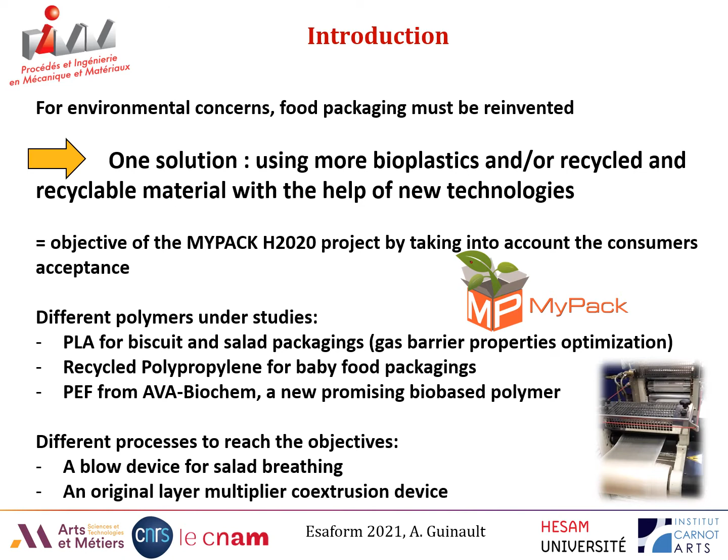The different polymers were PLA for biscuit and salad packagings, where we need to optimize the gas barrier properties, recycled polypropylene for baby food packagings, and in our case, PEF from Ava Biochem, a new promising bio-based polymer. About the processes, we have used in the project a blow device for salad breathing, that is very new, and in our case, an original layer multiplier co-extrusion device.

So if you look at PEF, it's interesting because it has higher barrier properties than PET and PLA - a factor 6 to 8 better than PET and around 100 better than PLA. It has good processability like PLA and PET, and good mechanical properties, even if it is brittle. But it has a drawback: it is too expensive to be used alone. It costs around 4 to 5 euros per kilo.

So an idea is to associate it in low proportion, 5 to 15%, by classical co-extrusion to make 3-layer films, for example with another polymer, bio-based or compatible for recycling, for example polyester. So two ideas have been worked on in the project.

PLA-PEF films in order to replace PET by PLA, where a factor 10 in oxygen permeability is needed, but this will not be presented in this work today. And another one, PET-PEF films, where we can decrease the PET food packaging thickness by decreasing the PET permeability - that is interesting for environmental concerns. Secondly, to replace harmful coatings, PVDC, for high gas barrier PET. But it needs more gas barrier factor improvement.

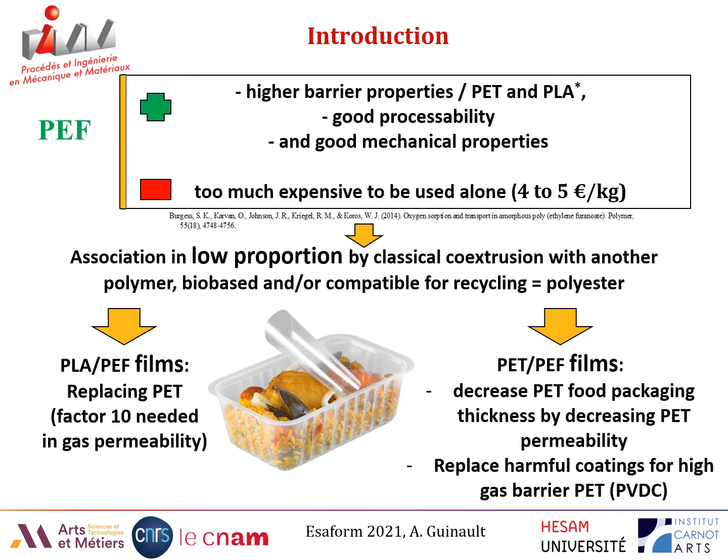So an original co-extrusion tool, the layer multiplier co-extrusion, was used in the project. It is used generally to create multi-nanolayer film, from a classical 3-layer structure to 500 or more confined continuous layers, sufficiently thin - down to a few nanometers - and numerous enough to be measured by the classical thermal, physical, and permeability methods that we use in the project. In the device, you put the PET in extruder 1, PET in extruder A, PEF in extruder B, and a black box permits fabrication of an ABA structure - PET, PEF, PET.

When you use multipliers, you can divide the ABA structure to form an ABABA structure with 1 multiplier - 5 layers. If you do the same with another multiplier, from 5 layers you get 9 layers, and so on. If you use 9 multipliers, you can have around 1,000 layers, and with 10 multipliers, you can have 2,000 layers. So it is possible to calculate the theoretical layer thickness of each layer.

For a film of around 100 micrometers in thickness, comprising 90% PET and 10% PEF, this means you have only 10 micrometers of PEF, and if you use 8 multipliers for example, you have around 250 layers of PEF, so the theoretical thickness of each layer is around 40 nanometers.

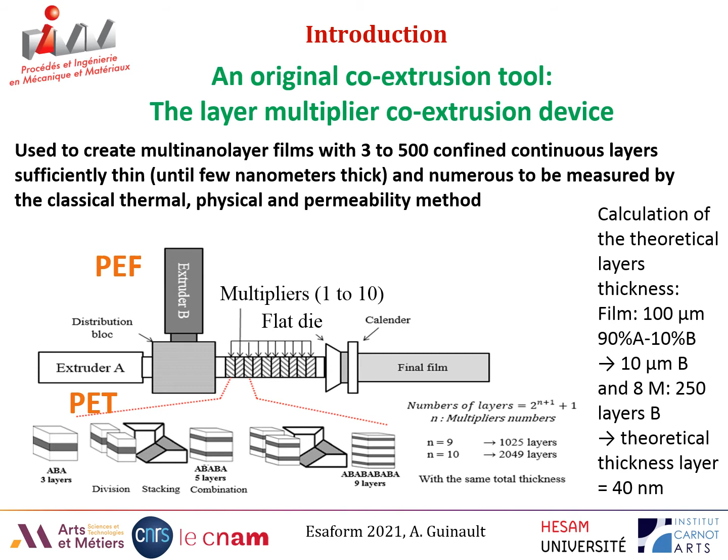So the interest of layer multiplication is to decrease the layer thickness. Why? Because it induces geometric confinement, restricting the space for the molecules and modifying the crystallinity, and finally the gas permeability - that is of interest for our project.

If you look at some work from a Baer team, you can see a system where PEO, polyethylene oxide, is confined between PP layers at 30 to 100 nanometers. You can see that by decreasing the layer thickness of the PEO, the permeability of PEO inside the film decreases by a factor of 10 to 100 when the polymer is confined to a nanometric dimension.

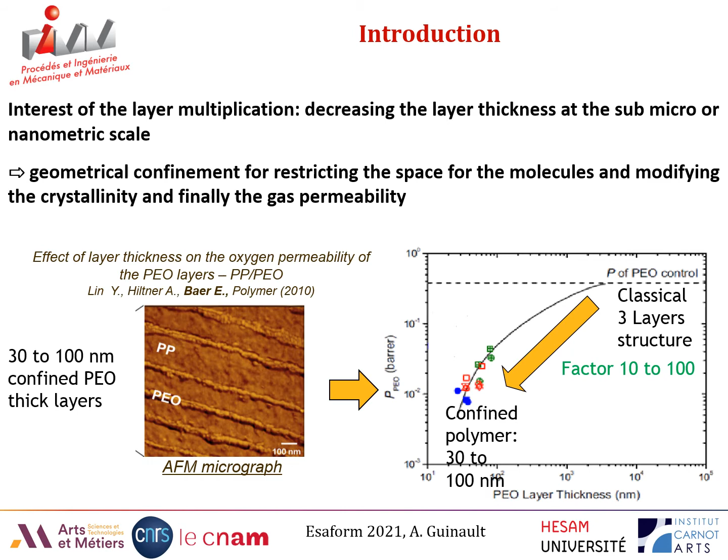So the objective of this work is to fabricate 100 micrometer thick PET-PEF film with different PEF crystallinity degrees, because crystallinity degrees act highly on the gas barrier properties. For that, we have fabricated 3-layer films with 0 multiplier, 128-layer films with 6 multipliers, and 512-layer films with 8 multipliers.

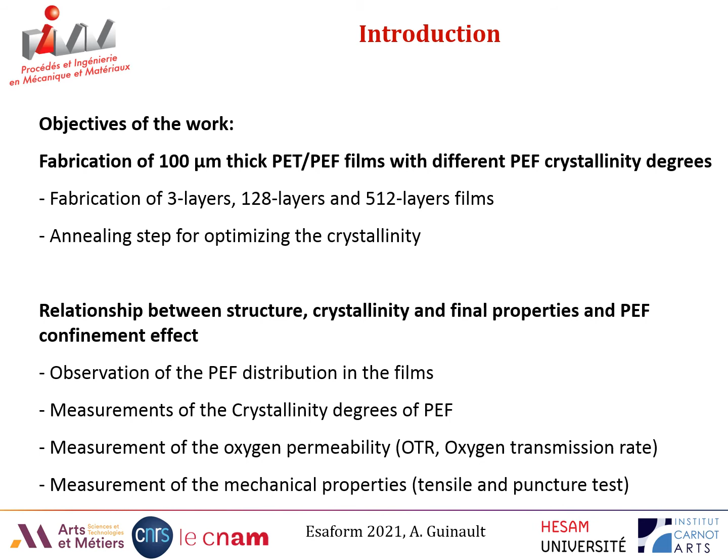We have also done an annealing step for optimizing the crystallinity, and the work consists of studying the relationship between structure, crystallinity, and final properties, and the PEF confinement effect, by observation of the PEF distribution in the film, measurement of the crystallinity degree of PEF, and measurement of the final properties - oxygen permeability and mechanical properties in tensile and puncture tests. So let me present now the experimental part.

We have used PET Indorama 101 and PEF from Ava Biochem. The films we fabricated consist of 3 layers, 128 layers, and 512 layers, with total thickness around 100 micrometers. The proportion of PEF varies from 10 to 15%, so the PEF theoretical thickness varied from 10 micrometers to 60 nanometers with 512 layers, and 230 nanometers for 128 layers.

In this condition, we obtained by extrusion a good film, as you can see in the figure at right. The PET-PEF film looks like PET film - very transparent and of good quality - but it was not possible to produce the film with 512 layers, probably due to the PEF layers being too fine.

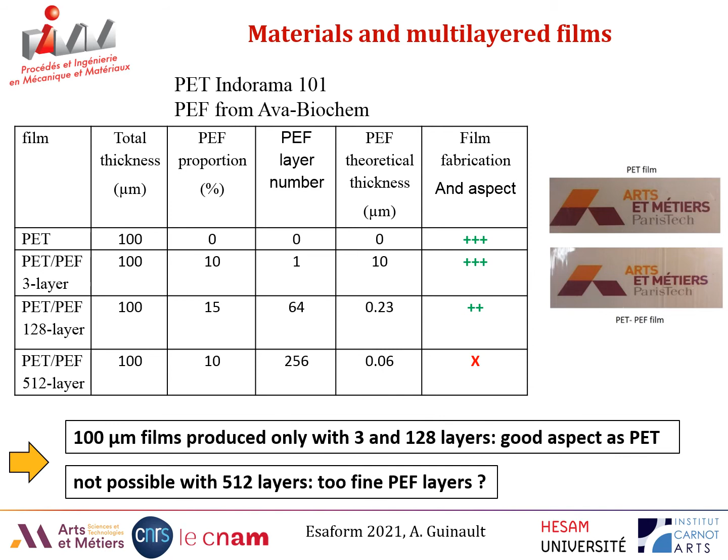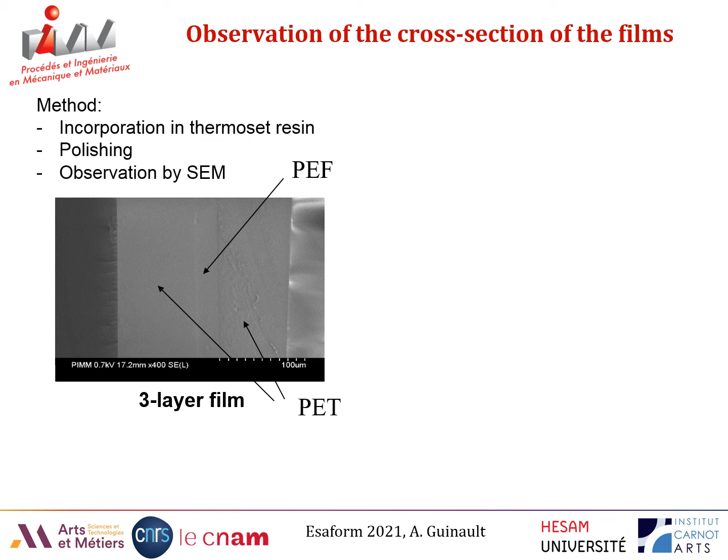Now we have observed the morphology of PEF in the film. In the 3-layer film, you can see on the figure that you have a continuous layer of PEF inside PET layers that are outside.

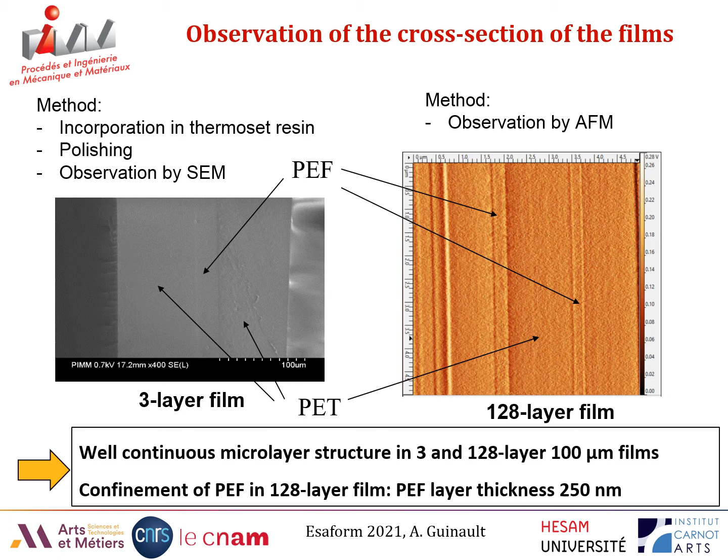Now we have to determine the crystallinity degree of the film, and particularly for the PEF in the film, so that you have used thermal analysis and differential scanning calorimetry.

Here you can see for the 3-layer film the first heating of the PET-PEF film, and you can see that you don't have at the first heating a melt peak of PEF at around 210 degrees Celsius. So it means that PEF is amorphous in 3-layer film as expected.

In the 128-layer films, you can see that you have a peak at 210 degrees Celsius. So it means that you can calculate a crystallinity degree of around 8%. That is low compared to that of pellets, which was 30%, but was higher than that of the 3-layer film, so perhaps due to confinement effect.

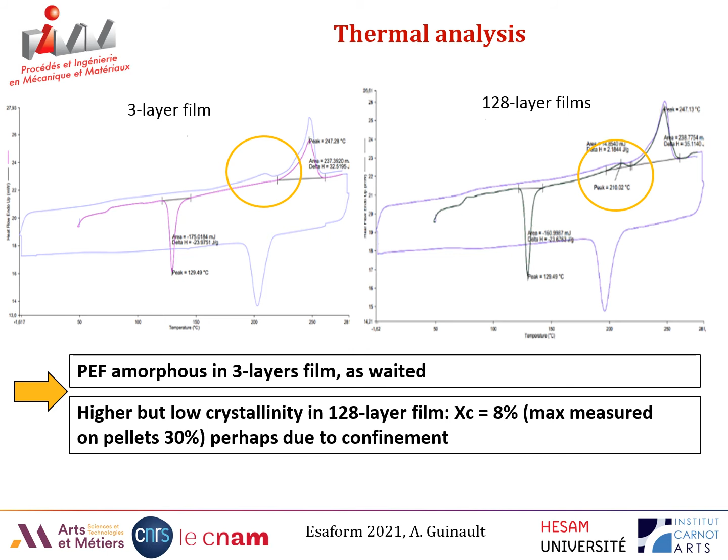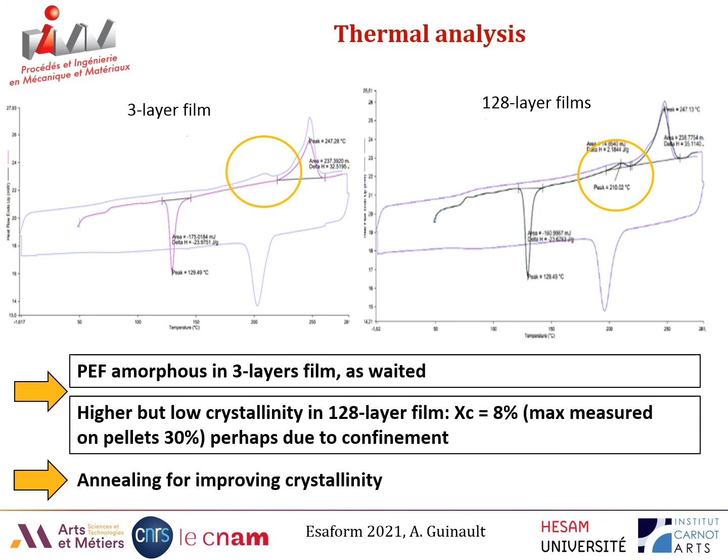So as the crystallinity degree are not very high, an annealing step was done for improving crystallinity. The annealing was done between heated plates in a compression device, as you can see on the figure, and we have determined the best condition for the crystallization of PEF on neat PEF alone, with 140 degrees Celsius for 2 hours.

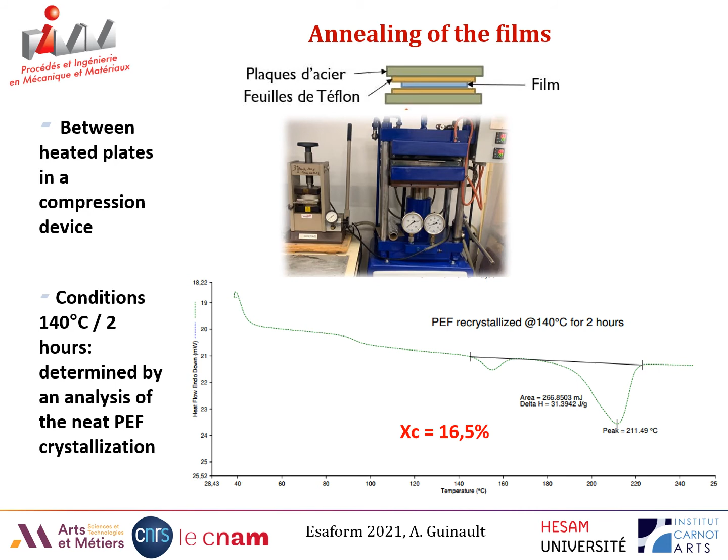We have determined a crystallinity degree of around 16.5%, and finally, if you change the condition, you find no more crystallinity degree. So we have taken this condition.

So now it is interesting to see how crystallinity becomes in the 3-layer and the 128-layer film after annealing. So you can see that the crystallinity degree increased from 0 to 10% for the 3-layer film and 8 to 14% for the 128-layer film. But look, it's interesting, but you have a whitening of the film due to PET crystallization, that is classical for that.

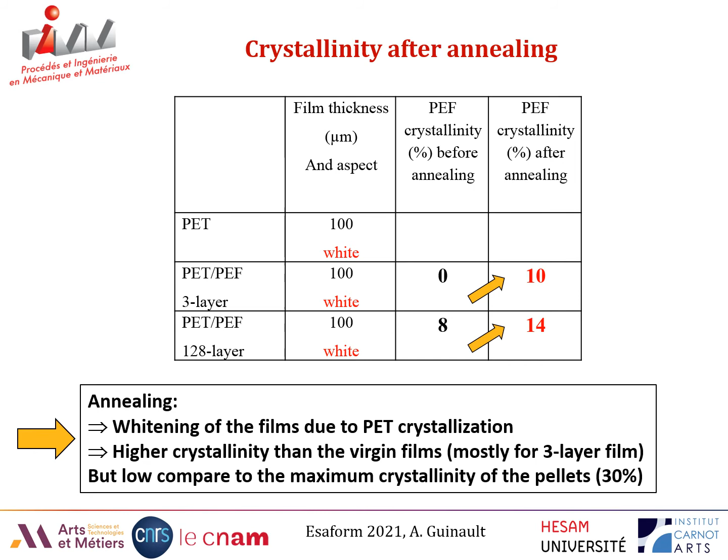About the mechanical properties, and especially tensile test without annealing, we have measured the stress, the modulus, the stress at yield, the strain at yield, the stress at break, and the strain at break.

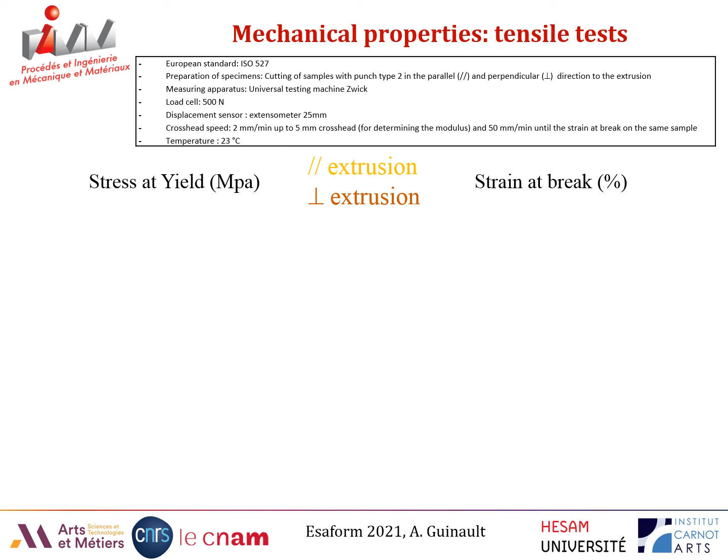Here I show you the stress at yield and the strain at break in the parallel direction of extrusion and perpendicular direction to extrusion. And so what you can see on the two graphs is that finally we don't have any effect of PEF incorporation in PET films without annealing, whatever the number of layers.

So it means that you can incorporate PEF that is brittle, but it doesn't bring a decrease of the mechanical properties. That is good.

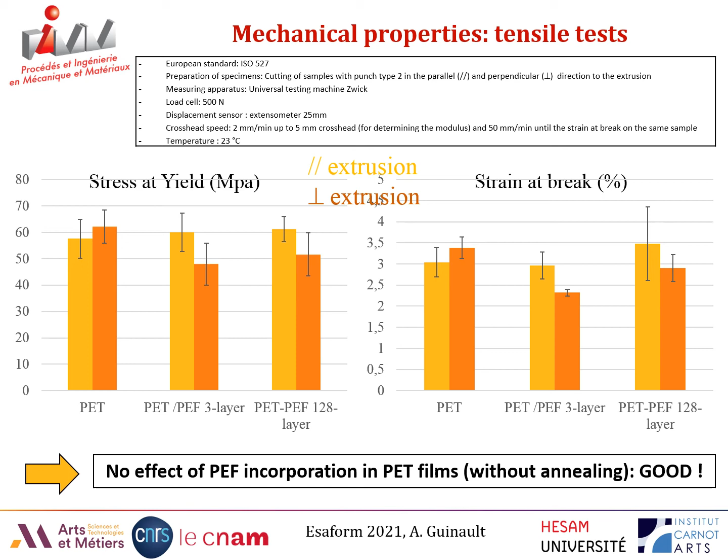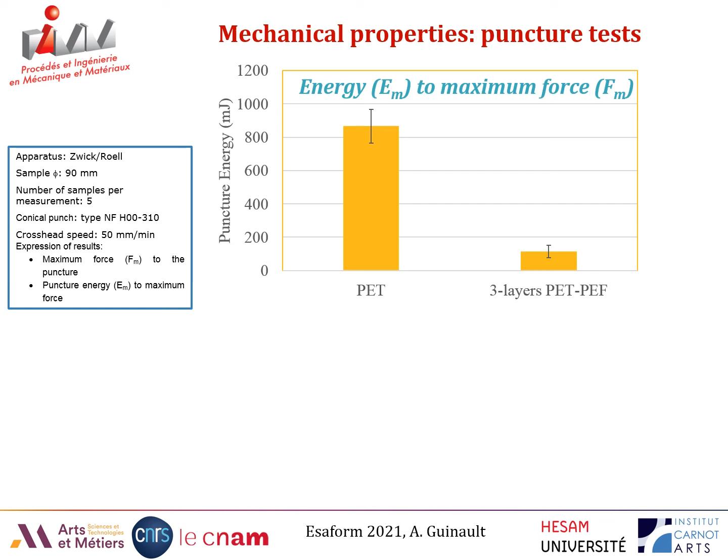About the mechanical properties in puncture test, it's more interesting because in this case you can see that when you add PEF in PET 3-layer films, you can see a high decrease of the puncture energy that is divided by 7, even if finally PEF is amorphous.

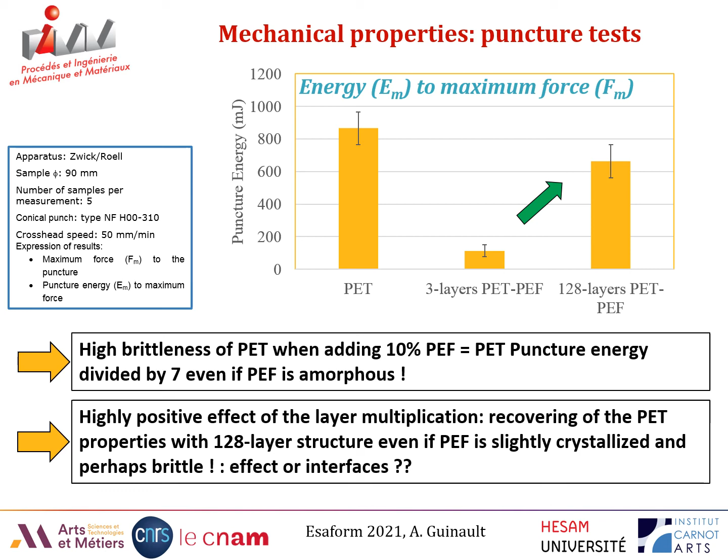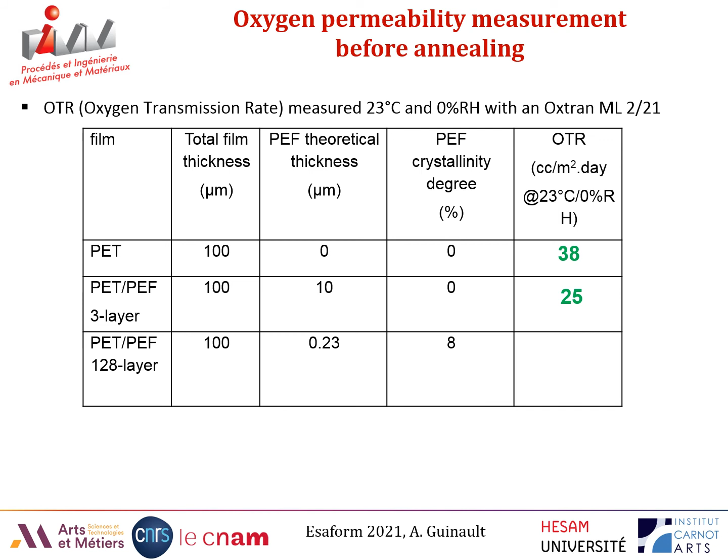When you add PEF in the 3-layer and in the 128-layer film, the value is around 25. It decreased by a factor of around 1.6, whatever the layer number, and it is finally in agreement with what was expected by calculation using the series laws for permeability.

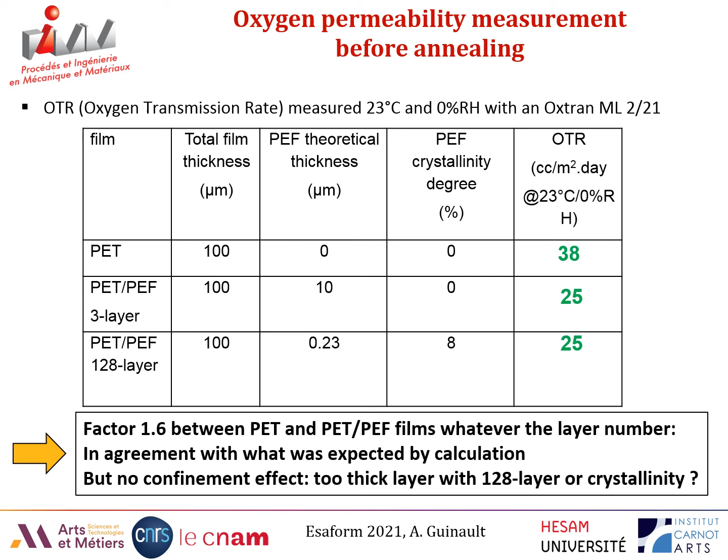It's normal, but it means that as we do not have any effect with the 128-layer film, it means that you don't have any effect of confinement.

Now we can see the effect of the annealing and the increase of crystallinity on the gas barrier properties of the films.

So you can see that for PET, when you do an annealing, you decrease the oxygen transmission rate from 38 cc per meter square per day to 23. But for PET PEF 3 layer and PET 128 layer, the value finally doesn't decrease but increases.

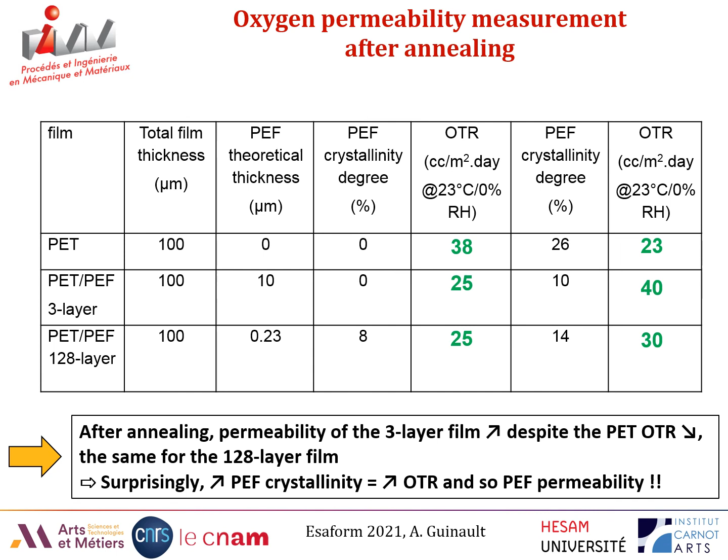So after annealing, you can see that surprisingly, if you increase PEF crystallinity, you increase the oxygen transmission rate and the PEF permeability. That is not a classical result.

So to conclude, it's possible to fabricate PET PEF film with good quality and a continuous microlayer structure. We have a slight PEF crystallinity increase with layer multiplication and annealing, but we don't have an effect on tensile properties.

That is very good. But unfortunately, we don't have a positive effect on gas barrier properties, and it is interesting to understand. And surprisingly, we have a positive effect on puncture tests with layer multiplication, as we have said. And perhaps it is an effect of interfaces.

Now, perhaps we have used too low a crystallization temperature, but it means that this study shows that we have an original Ava Biochem's PEF crystalline behavior effect on final properties.

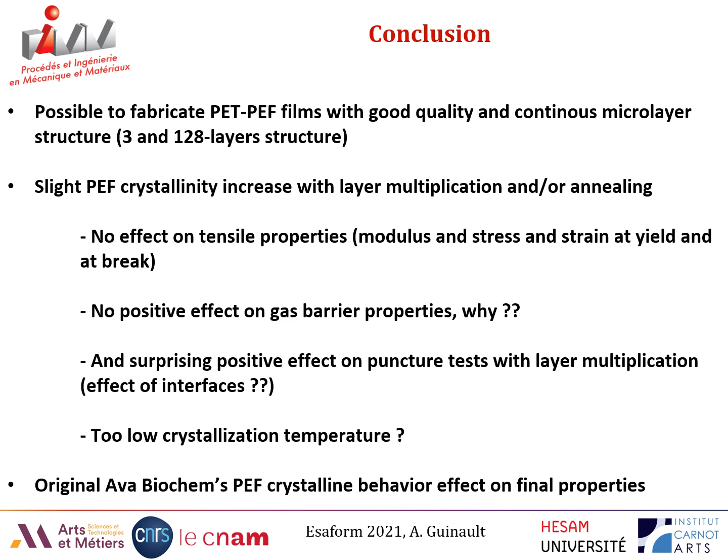So in perspective, we have to study the relationship between crystallinity and gas barrier properties of virgin biosourced PEF, to analyze the crystalline form by X-ray diffraction. And what is interesting also is to use biaxial stretching.